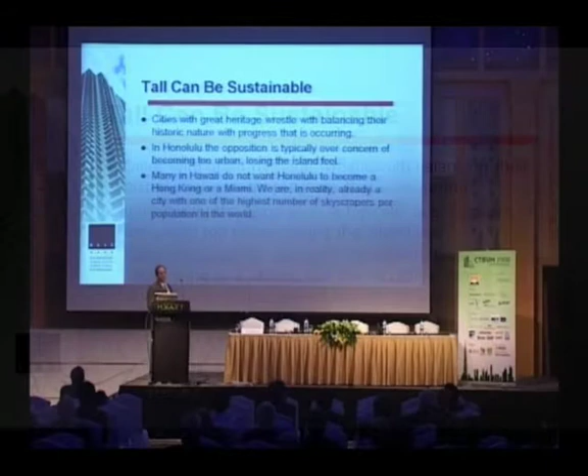But at the same time, we have a problem with housing. We don't have enough housing, especially affordable housing. And the only way you're going to do affordable housing in a tight, expensive land market is to go up. So tall can be sustainable. Cities around the world, especially in Europe, have a problem with tall because of the historic nature of their cities and communities.

In Hawaii, it's losing touch with the rural feel and the great tropical place that it is. And many people in Hawaii don't want Hawaii to become a Miami or Hong Kong. But in reality, we're a major city, 1 million people out in the middle of nowhere, actually the most remote large city in the world.

Skyscraper density: I found that at one point Honolulu was number 6 on this list. Honolulu is on the island of Oahu. So we have a pretty high density of skyscrapers, and that goes again to land that's reserved for agriculture; land in the urban core is very expensive.

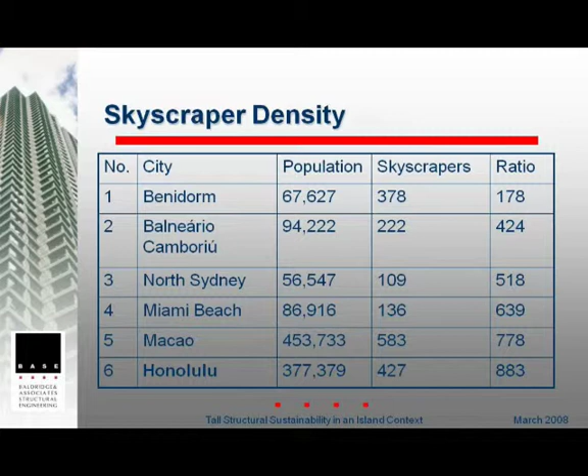What we've had, though, is a problem with misguided height restrictions. Building heights have been limited to 350 to 400 feet. These restrictions date back to the 50s, when they wanted to temper growth a little bit and to take advantage of the mountain and ocean views. I think Vancouver has done an excellent job of allowing buildings to go taller and actually making more view planes to the mountains and the oceans, and I hope at some point Hawaii does.

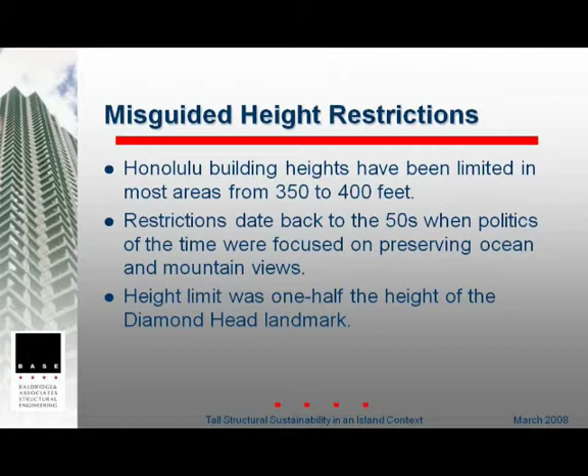Our height limit was pretty much limited to half the height of Diamond Head, which is a landmark in Honolulu. And the buildings on the right are some of the high-rises in Honolulu. They look pretty small, dwarfed when you compare them to the Sears Tower and Taipei 101.

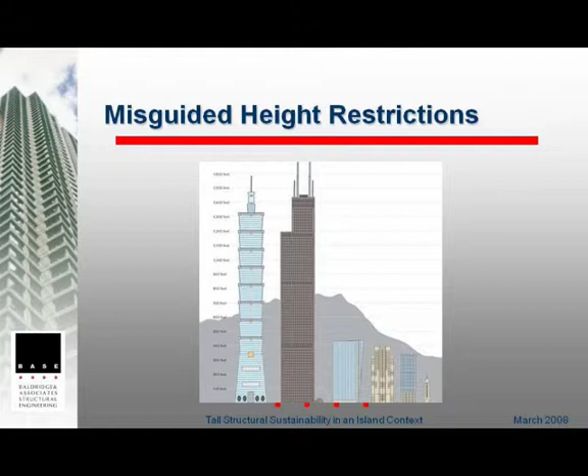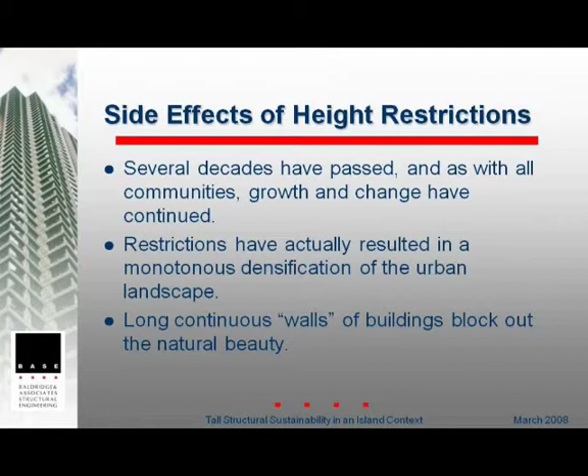But there's also been a side effect of height restrictions. Communities grow and change. The restrictions have actually created a lot of monotony in the landscape. If you look at Waikiki from the ocean, you see every rooftop is at 350 feet. You can't see in between these buildings anymore.

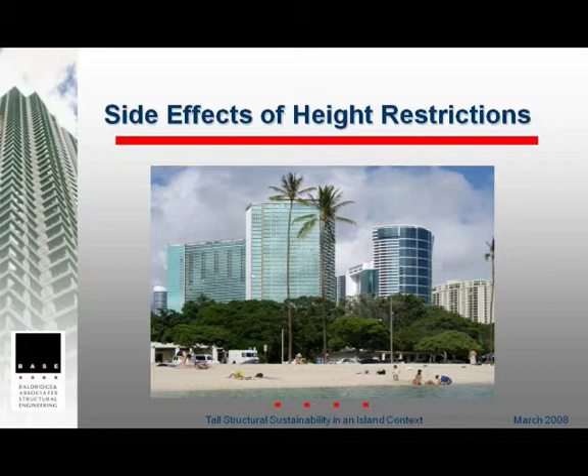The developers, in order to make these buildings work, have to maximize their floor areas. And when they maximize their floor areas, they're maximizing their height. Every one of these developers would have loved to have gone higher. And in doing so, they could make the buildings not as wide and not as fat. From this particular angle, you can't see anything between any of these buildings. It's really quite a shame.

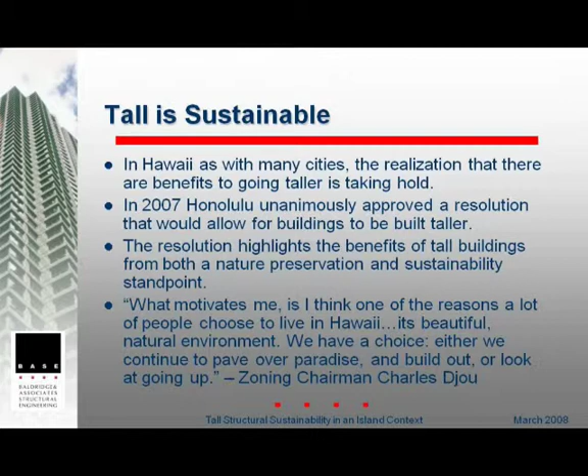So Honolulu is now starting to look at some of the mistakes they've made and thinking maybe we should go higher. And I think this is a great quote from one of the council chairmen: what motivates me is that one of the reasons a lot of people choose to live in Hawaii is its beautiful natural environment. So we have a choice. Either we continue to pave over paradise and build out, or look at going up.

We're getting ready to do our first transit, a very expensive project. I figured if you took that same money and built taller buildings in town, the cost of building those buildings would actually be cheaper than the transit, and you would have more people closer to the urban core.

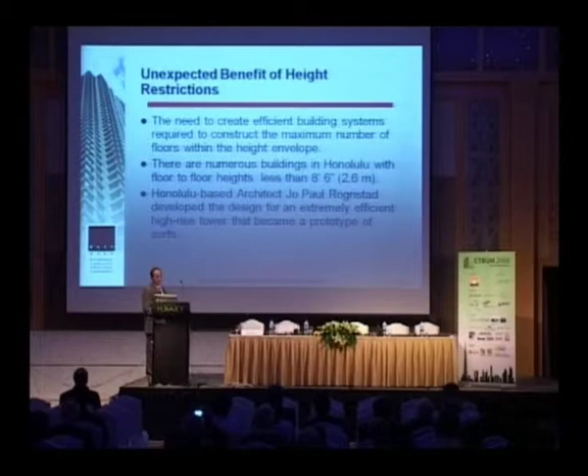There's also been an unexpected benefit to these height restrictions. Buildings have had to be very, very efficient. Another city that might be comparable to this is actually Washington, D.C., where height restrictions are based upon the Capitol building. We have a lot of buildings that have floor-to-floor heights of 8'6", 8'5". We have parking decks in buildings where the floor-to-floor height is only 8 feet.

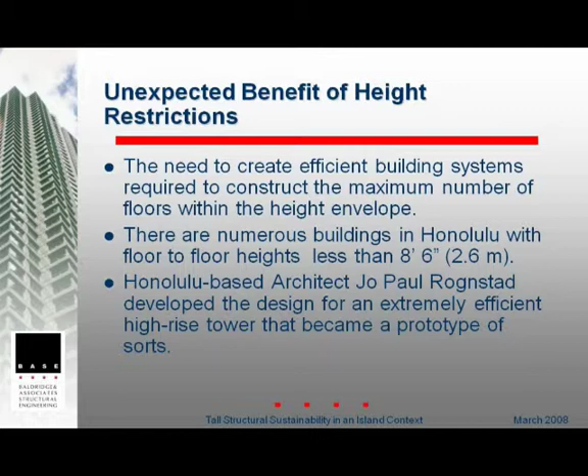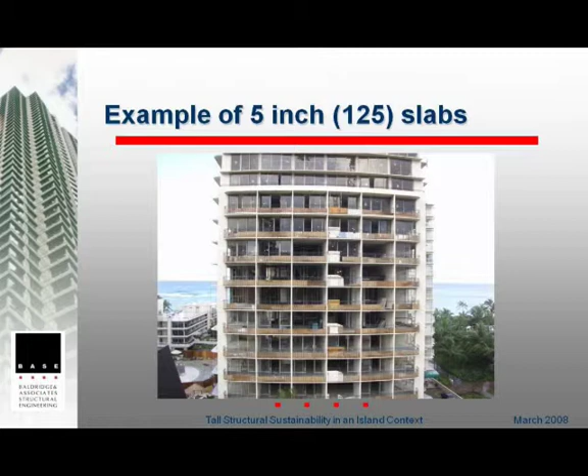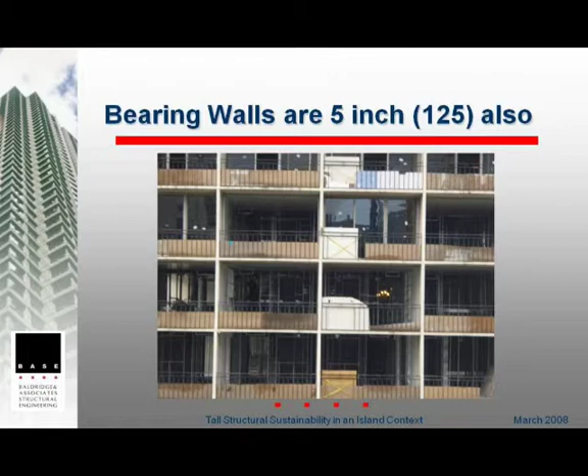And there was a local architect in Honolulu who actually did quite a number of 40-story plus buildings. They weren't the prettiest buildings, but he kind of created a little bit of a prototype. Oh, I guess that's not going to work. But anyway, this is an example of a building with only a 5-inch, 125-millimeter slab. Even the walls are only 5 inches thick. And the only reason they're doing this is because they're going to get as many floors as they possibly can within a height restriction. The one advantage of that is your buildings are a lot more efficient.

So when we talk about sustainable design as structural engineers, everyone talks about fly ash. Everyone talks about recycled steel. But how are we using those products? Take water, for instance: tap water, bottled water in plastic, or out in the front you see some bottled water in glass. Well, tap water is the most sustainable because it's coming through the pipe system. This is probably second most sustainable because it's going through that same pipe system, they're filtering it, then they're putting it in a plastic bottle that's probably not biodegradable.

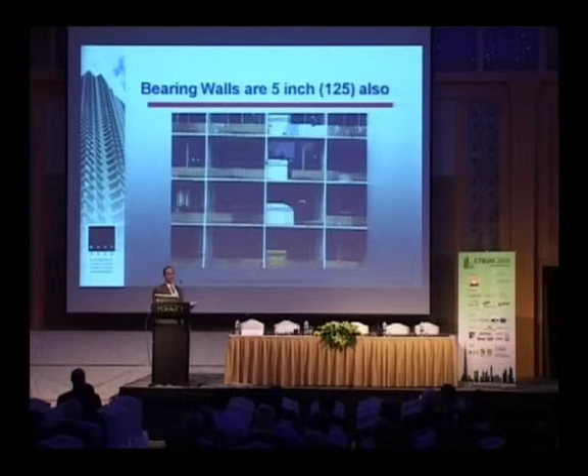They're sticking that on a truck, and they're shipping it to the same place where you can get essentially the same water out of the tap. And then the least sustainable is bottled water that might be coming from Italy or France, all the way across the ocean to Dubai. So for sustainable structural design, it's really important to remember it's about how much material you're using. One of the key things that a structural engineer can do, along with helping the architect and mechanical engineers, but internally, is thinking about how much material we're using.

It's pretty amazing. They say the building industry consumes 3 billion tons of raw materials annually, 40% of the total material flow in the global economy. The manufacturing process of new materials is water and energy intensive. They say the manufacture of cement is one of the biggest pollutants out there. Harvesting, extracting, mining and processing of new materials is a big drain on the world, especially as the rest of the world wakes up and starts to develop as well. The life of the land is perpetuated in righteousness, so we can't overmine, we can't take all the materials out.

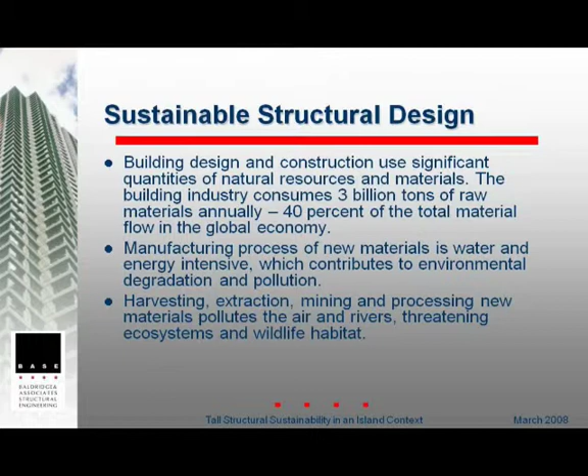So in view of this, what you've got to do is really think about, can we use less materials, minimize the consumption and depletion of material resources, minimize the life cycle impact. From a structural engineering standpoint, the most significant contribution that we can make to sustainable design is to optimize the structural systems and reduce the material requirements of a project. We've got to reduce the amount of materials.

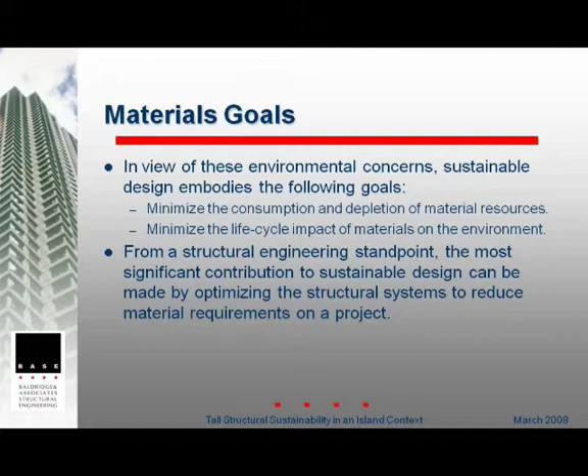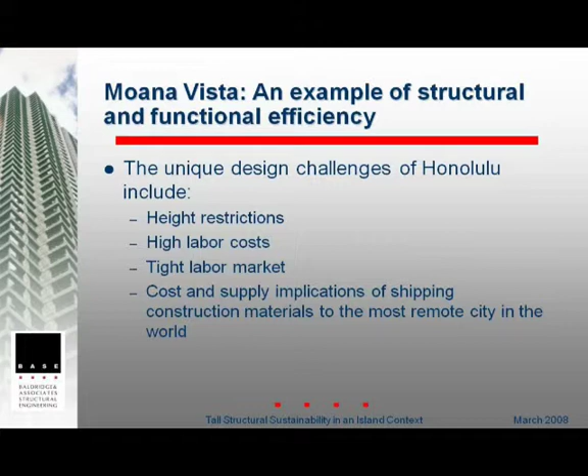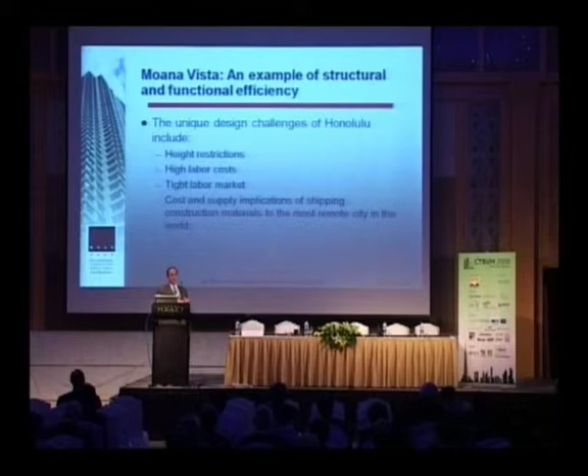And even in the design concepts, we have to think what's going to fit into a 40-foot container and try to design around that, or what can fit on a barge. This was a collaborative effort. We were kind of brainstorming with the architect, and I pulled out some old books that I had. I actually grew up in Chicago during the period when the Sears Tower and the John Hancock building were being built. And like the form of the X-brace actually expressed in a concrete building, which was first built in New York and then later done on 2 projects in Chicago. The architect loved it. The benefit was it was very efficient.

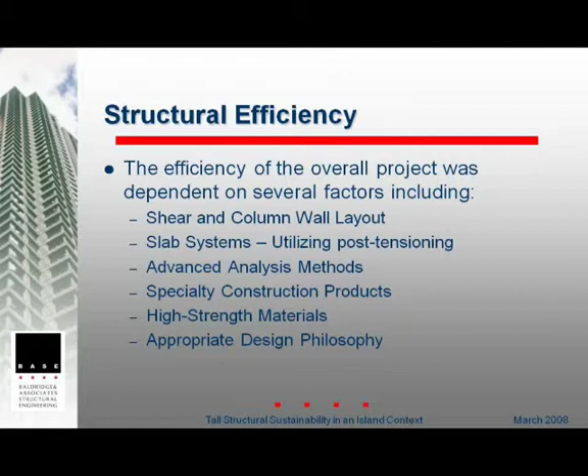So in taller buildings, a number of strategies can be used to provide efficiency, reducing wall thicknesses and reinforcing requirements. Some of these include coupled shear walls. By linking two or more walls together, they act as one instead of two separate walls. Outrigger systems. In Hawaii, a lot of people outrigger canoe, and you'll see these canoes out there, and it keeps it from tipping. It's the same concept. If you can get an arm out there, you get the moment arm, you have a much more efficient building.

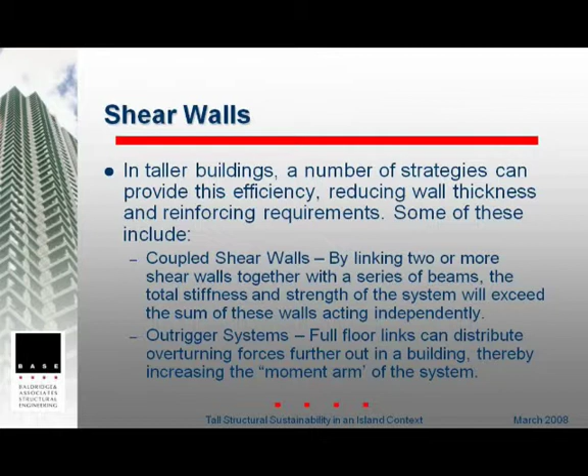Punched shear walls. Residential buildings, at least in the U.S., can be very expensive to build because of the exterior cladding; there's a lot of liability issues, and what we found is sometimes it's better actually to use concrete as the exterior cladding. It's almost gotten to be the same price, and then you're getting structure and cladding in one. And then shear wall frame interaction is another way.

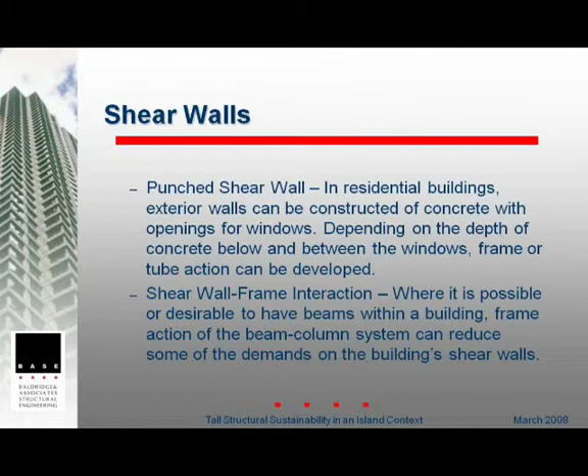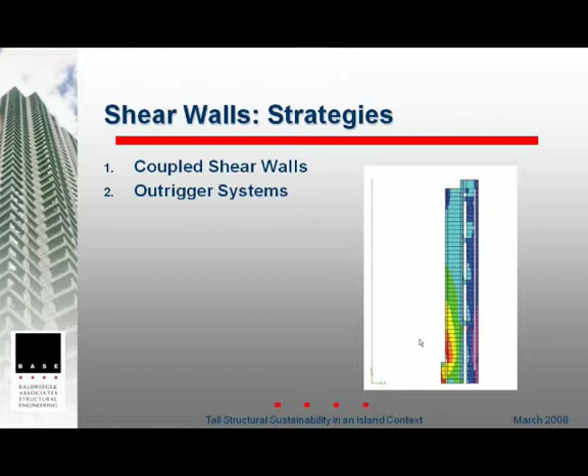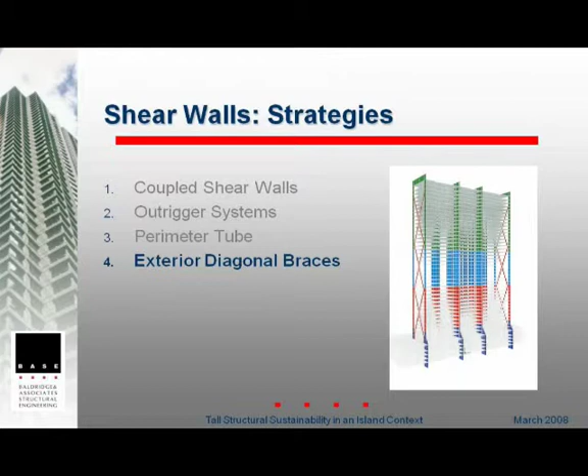And on the Moana Vista project, we actually had a combination of X-braces on the outside, coupled walls on the inside. One of the real big criteria with this as well was to create a zero-loss building. And when we say that, in Hawaii at least, the condo laws, what you sell as sellable areas, they call paint to paint. So it's from inside of finish to inside of finish. And we tried to come up with a system where the concrete walls would be no thicker than a drywall partition, so that the owner wasn't losing any of their sellable floor area from the maximum amount of floor area they could build.

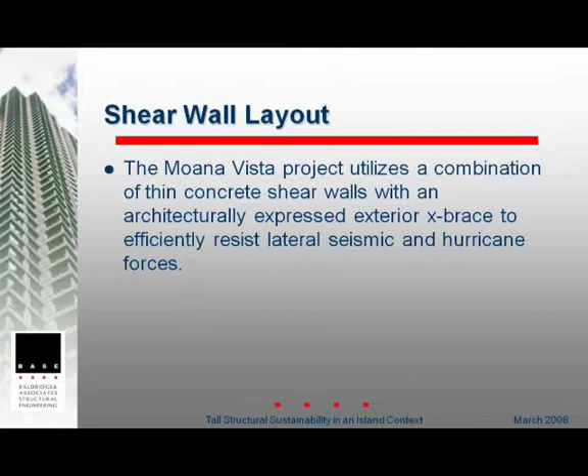So we're using a combination of thin concrete shear walls and an architecturally expressed exterior system that efficiently resists the lateral seismic and hurricane forces. We had no uplift in our foundations because we had a big arm that we engaged in this system.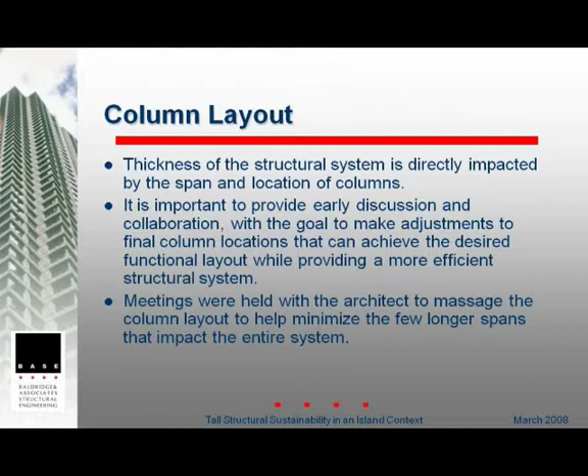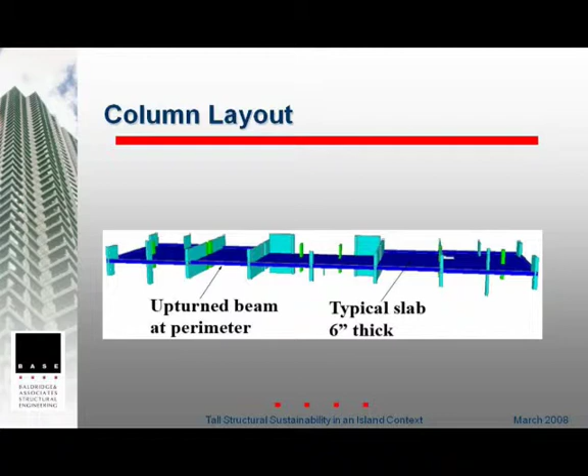On the Moana Vista project, the unit layouts were about 10 meters wide. We needed to get a 6-inch slab, maximum 6-inch slab on this thing, 150 millimeters, to get it to work. And we actually combined an upturned beam at the perimeter that would support the glazing along with the thin slab.

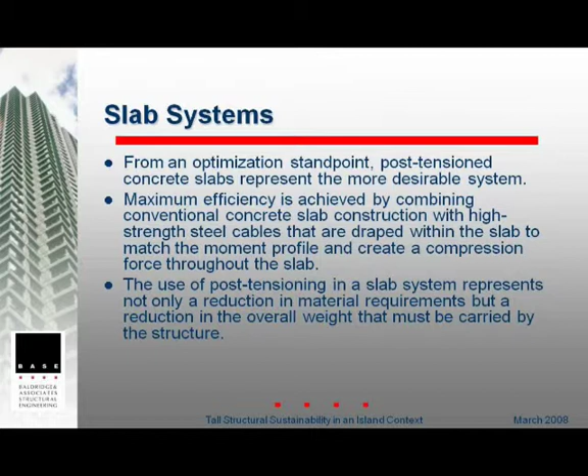So for the slab systems, from an optimization standpoint, you really can't beat post-tension. A post-tension slab is usually about 25 to 30% less thick than a normal reinforced slab. You're getting maximum efficiency because the high-strength steel cables are actually draped to follow the stresses in the slab, so there's no waste reinforcing. And the use of post-tension in a slab system represents not only a reduction in material requirements, but a reduction in the overall weight of the building. And that weight must be carried by the columns, the walls, and eventually it also ends up in the seismic forces on the building.

So this whole focus on getting a thinner slab to work saves money on the columns and foundations, reduces the weight, reduces the material requirements for these elements. And if you're working in a seismic region, the seismic forces are based on the weight of the building. So if you can decrease the weight, you're automatically decreasing the seismic forces that you have to design to. And we'll find that we get pretty close to where seismic and wind in our particular area end up being just about equal. So we're getting a nice multi-hazard system going.

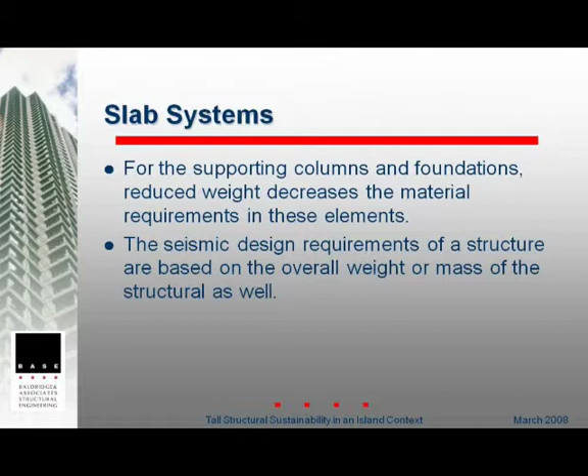There's actually been LEED recognition for innovations in design, and post-tensioning is starting to show how that works. Reduction of concrete. This was actually a study done by Mr. Watry, I believe it was for PTI. 16% less concrete, sometimes more. Reduction in reinforcing steel. If you ever go out and look at a post-tension deck, there really isn't much steel in there. We've done a lot of decks where we had no bottom steel whatsoever in the slab.

The frame cost comes down. The overall building weight goes down. You can lower the building height. We've actually had situations where we didn't want to block the view of an adjacent building, but in most cases, we're not lowering the building height, we're sticking an extra floor in there. And also faster construction.

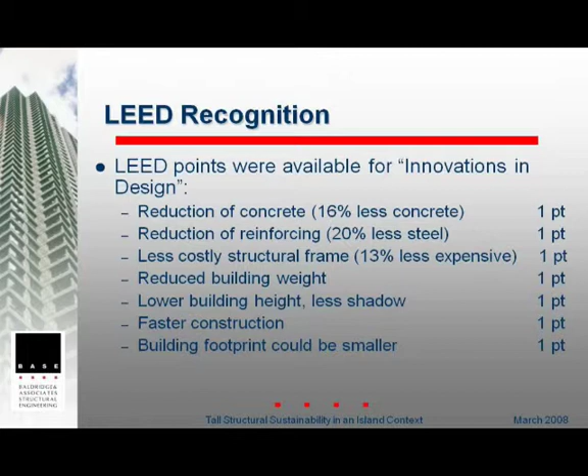Analysis methods are really important now as well. You see wild designs that are coming up. The architects are getting very creative. And some of the old methods that we had, you go through your old concrete manuals and you use formulas, WL squared over 8, WL squared over 11. And these are all great, but the simpler methods are approximations. And because they're approximations, they have a conservatism built into them. So the conservative results can lead the designer to both choose a thicker slab than is necessary and put in more reinforcing and concrete than is necessary.

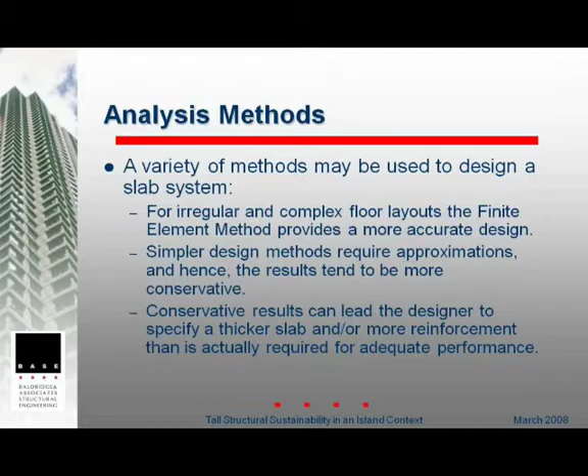So a lot of the industry is going to finite element analysis, where you're actually looking at the overall slab and really trying to determine its performance. I mean, we're not trying to cheat here. What we're trying to do is put the material where it's really needed. And the finite element analysis methods help you to do that.

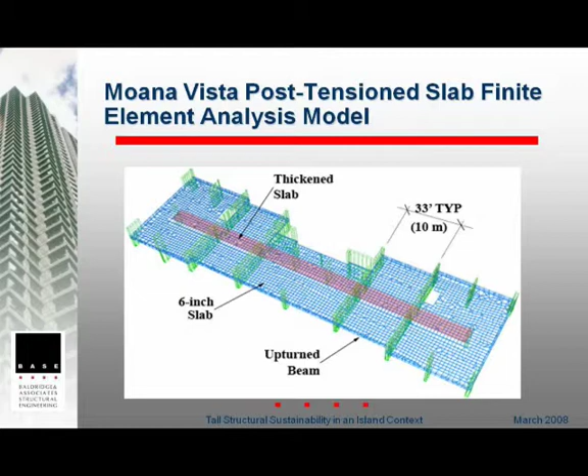In an example, you don't want the building to be too flexible. You don't want to have too much deflection. So you can start to accurately look at what are your hot spots, how much deflection you're having. Is it going to be a problem for the windows? Is it going to be a problem for the partitions, so you don't get too thin? And with post-tension, you can actually come back in there after the fact. You do your first run, and you can look at some of those hot spots and actually throw some extra PT in there if there's a problem, and lift them up a bit.

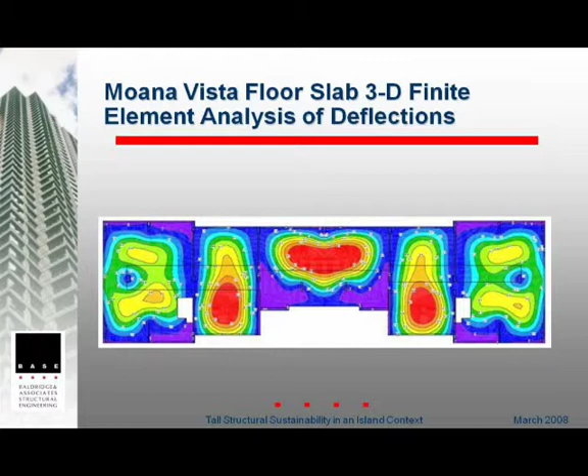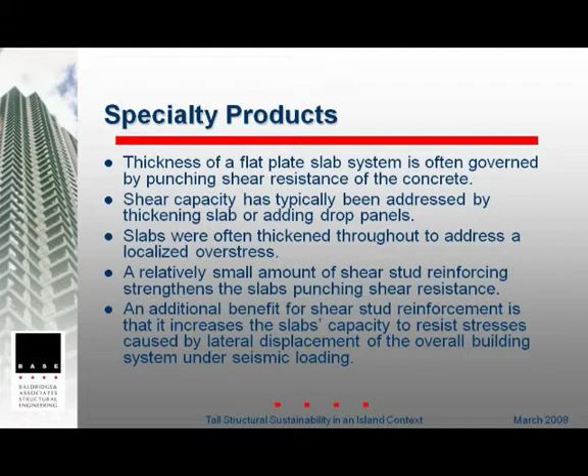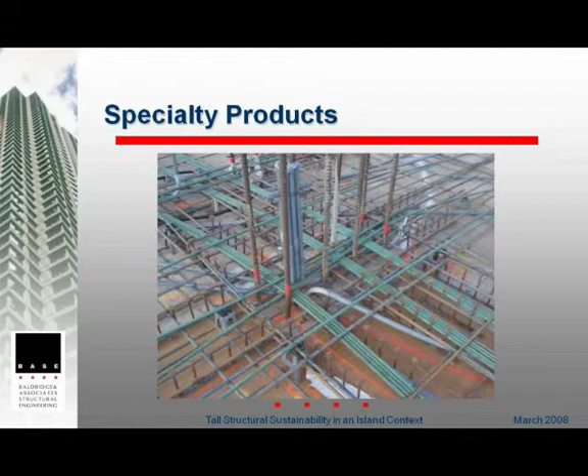Specialty products are coming out now. The construction industry has kind of been slow to evolve, but from a standpoint of slab technology, one of the big things that's been out now, actually developed in Canada, is stud reinforcing for punching shear. In the past, you'd either put drop panels or mini drop panels or thicken the entire slab, and now you can address it with punching shear reinforcing. It was discussed earlier, you're even using reinforcing that might be used for other things within the slab or the mat to handle that. It's a little bit hard to see, but off next to the rebar and between the PT, you can see the little studs. They're on little rails.

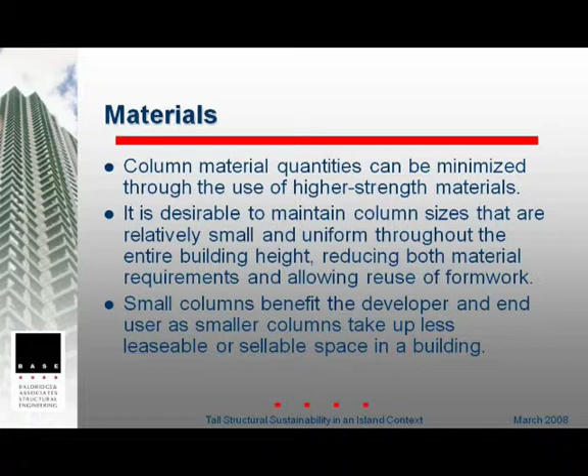Of course, column materials, what you want to look at, again, is you're selling floor area that's usable, so going to higher strength concrete, higher strength steels. You should always be using at least 75 KSI reinforcing steel in your columns. You're using less material, and you're creating better, more usable space. And that's done, again, just with high-strength steel and also the highest strength concrete you can get. Unfortunately, in our area, we can't get very high-strength concrete. It just has to do with the aggregates that we have. And probably not a good idea for us to start shipping aggregates from Seattle over to Hawaii. It gets a little expensive.

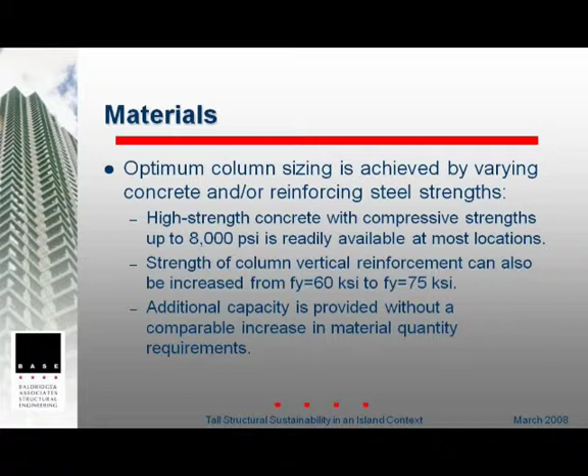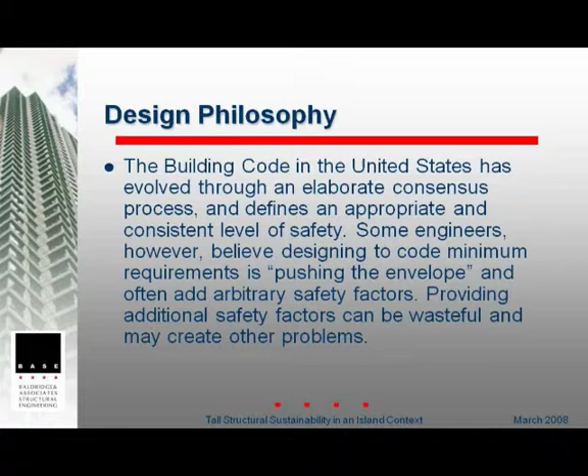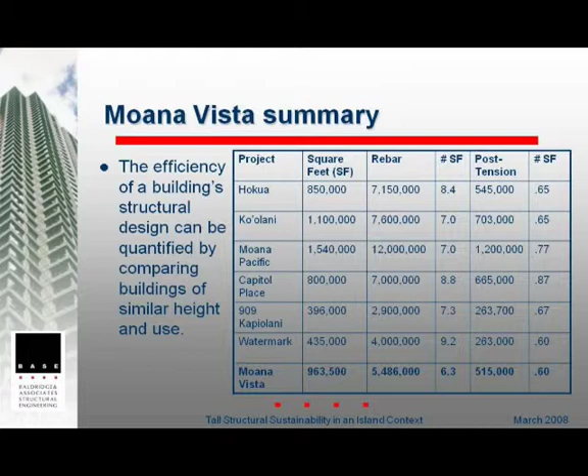I'm going to close with future projects because as engineers, we're always stuck in design analysis. We don't get to be too creative, but one of my clients who, oddly enough, sells motorcycles and cars is really big into sustainable design. His first dealership had photovoltaics on the roof. He's got natural ventilation, and he collects all the condensate water out of the AC system and uses that to wash off the motorcycles before he turns them over to the new owners.

So he's looking at doing the new tower with photovoltaics on the roof, wind turbines up on the roof and other areas, actually extracting out some of the groundwater and using the condensate water and whatever rainwater he can get off the roof. So they want to incorporate all these great technologies, and at the same time we can help them to try and make an efficient structure.

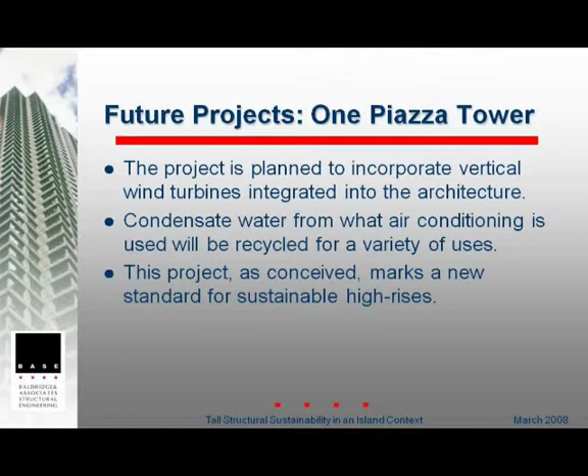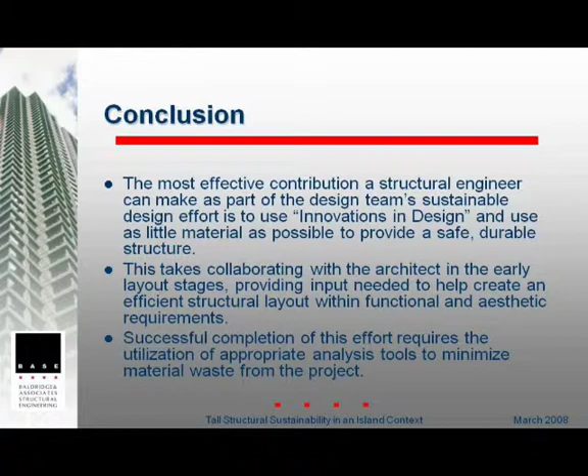So in conclusion, the most effective contribution as a structural engineer that we can make is to work with the team, but be innovative in our design approach and really be material conscious. Try not to waste materials. So we have to start early with the architect, tweak things a little bit, help them see what we need and what we can incorporate into their vision and the owner's vision. And the successful completion of this effort requires appropriate analysis tools and quality control during construction. Thank you.